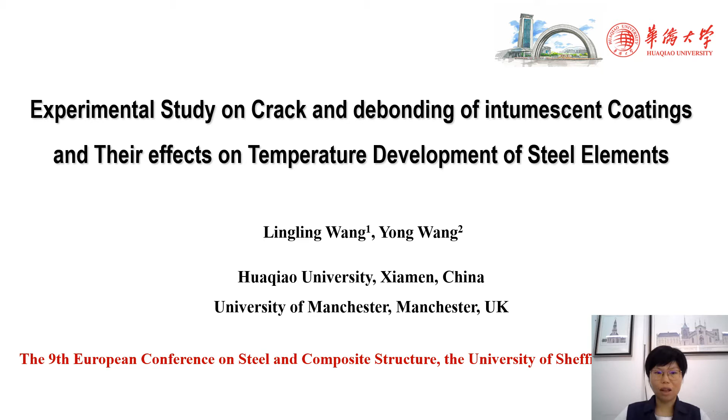Today, I hope to introduce my ongoing research on crack and debonding of intumescent coatings and their effects on temperature development of steel elements. In today's talk, I will cover 4 parts: introduction, experimental program, test results, and conclusions.

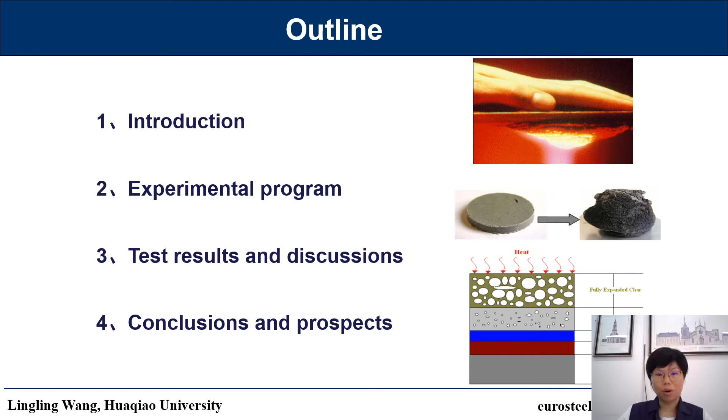Compared to other types of fire protection materials, intumescent coatings have become the preferred option because of their merits such as attractive appearance, lightweight, and off-site application.

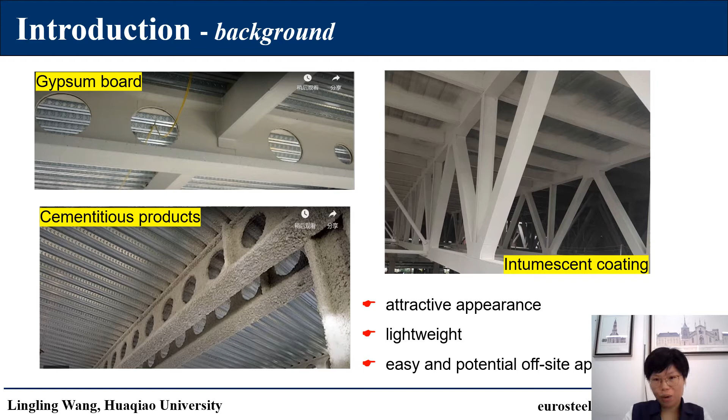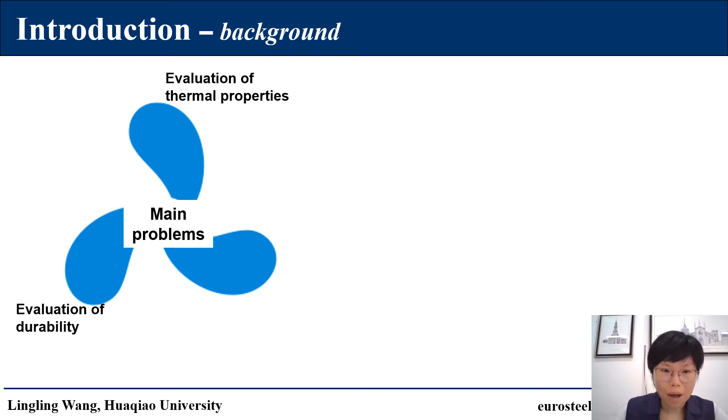Despite widespread use, many gaps exist in understanding of fire protection properties. Although progress has been achieved on the evaluation of thermal properties and durability, bonding with a protected substrate and the effects of their failure on steel temperature and structural fire resistance have not been investigated.

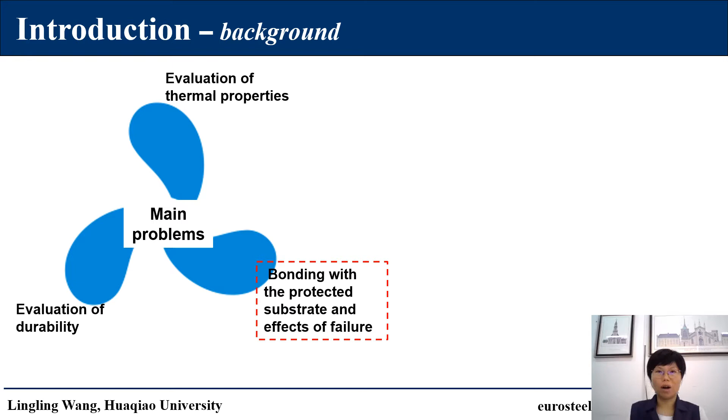In the specification, it is assumed that the intumescent coating char remains and provides a uniform fire protection. However, cracking, debonding, and sometimes falling off are expected to happen because of the property mismatch between the coating and the steel. Under these conditions, a non-uniform temperature distribution will occur in the protected steel substrate, and the behavior and failure modes of steel structure may change consequently.

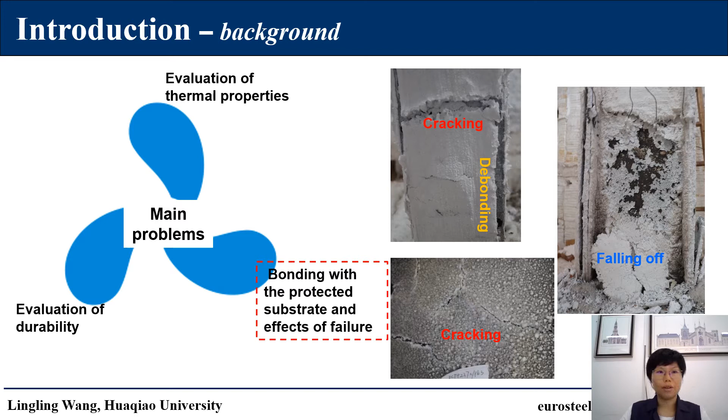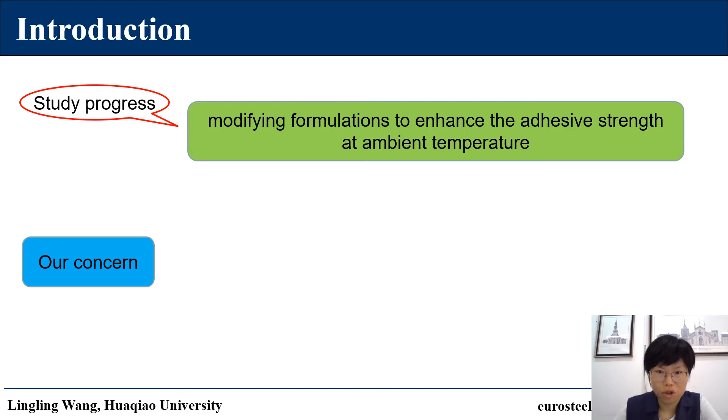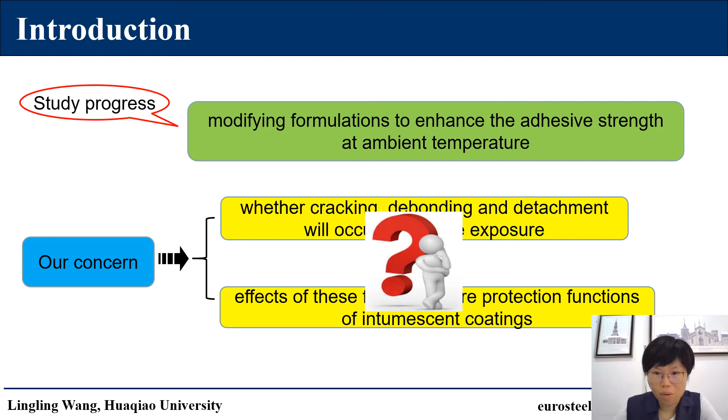A few studies have been carried out on the bonding properties of intumescent coatings. However, these studies have focused on modifying formulations to enhance the adhesive strength at ambient temperature. Engineers need to evaluate whether cracking, debonding, and detachment will occur during fire exposure and the effects of this failure on fire performance.

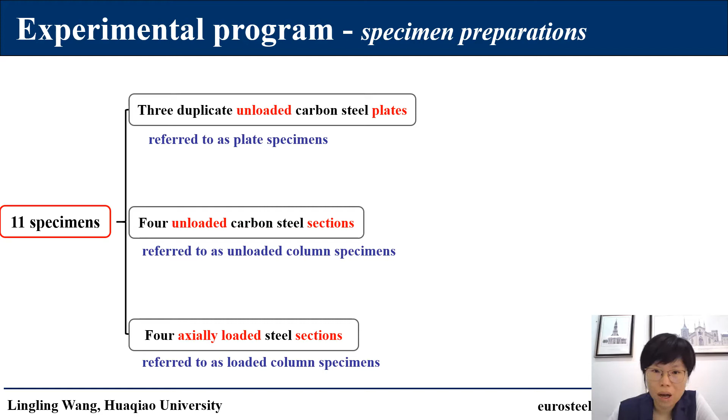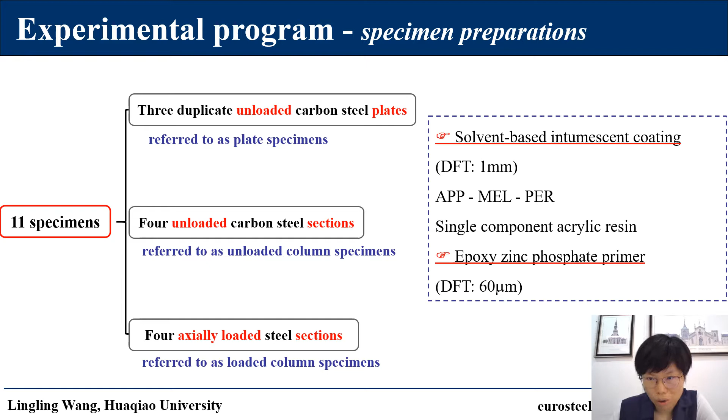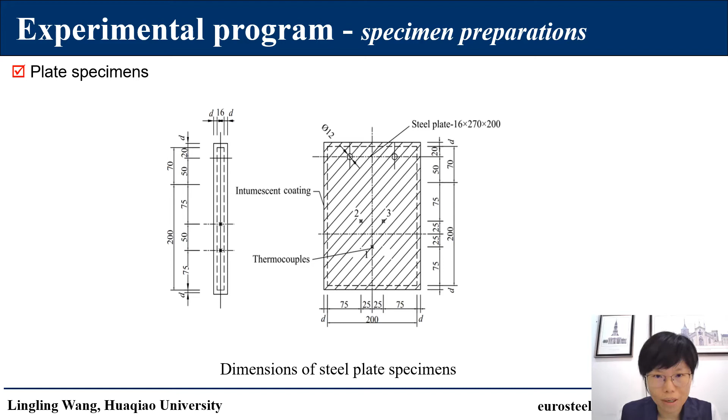An epoxy zinc phosphate primer was used on the surface of specimens before applying a solvent-based intumescent coating. The steel plates were protected by a primer and an intumescent coating on all sides. 3 thermocouples were embedded in each steel plate at the mid-thickness.

The 4 unloaded column specimens consist of 2 duplicate I-shaped specimens and 2 duplicate T-shaped specimens. These specimens had primer and intumescent coating on all sides except the top and the bottom, which were protected by a 100 mm thick rock wool. Temperatures were measured at 2 locations along the column height, with 6 thermocouples at each location.

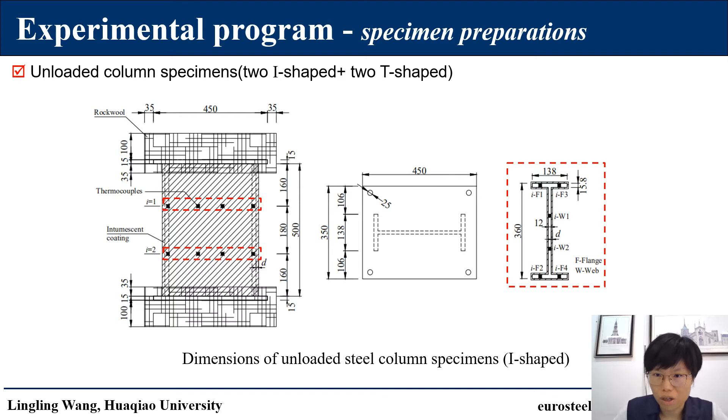Loaded column specimens consist of 3 I-shaped specimens and 1 T-shaped specimen. 1 loaded column used stainless steel, the other 3 used low-carbon steel. 1 of the 2 I-shaped carbon steel columns was sandblasted before applying a primer.

1 test specimen had 1 layer of carbon fiber cloth placed on the surface after the application of the primer but before application of intumescent coating.

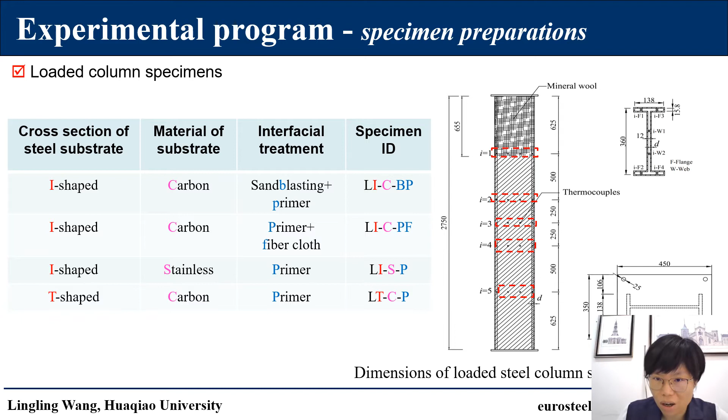The total height of the column was 2,750 millimeters. The exposure height of the column was 2,095 millimeters. Temperatures were measured at 5 sections along the column height, and each section had 6 thermocouples.

The plate specimens were tested together and were hung vertically on steel beams inside the furnace. Each unloaded column specimen was placed on a block of concrete inside the furnace. The 4 loaded column specimens were pin-ended, and a compressing load was applied at the center of the cross-section. Before fire testing, each column was axially loaded to reach a load ratio of 30%, and the mechanical loading condition was maintained during the fire test.

In all tests, the furnace temperature was regulated according to the ISO 834 standard temperature-time relationship. The axial deformation and temperature were measured and recorded continuously. Fire tests on loaded specimens were terminated when the axial deformation or deformation rate reached their limits. Fire tests on unloaded test specimens continued until the average steel temperature reached 700 degrees centigrade.

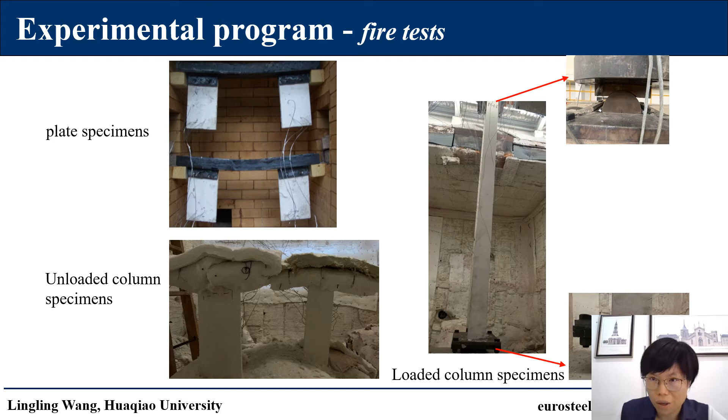With increasing temperature, intumescent coatings underwent melting, expansion, char formation, and char degradation. During the melting stage, intumescent coatings had a relatively high fluidity, which enabled the coating to deform with the substrate. After entering the stage of expansion and solidification, the viscosity of the coating increases, and there is a strain mismatch between the coating and the steel, which may lead to cracking and debonding of the coating.

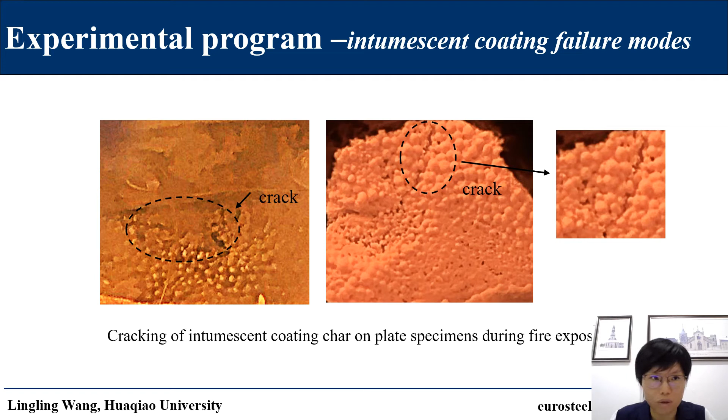This figure shows cracks of intumescent char on plate specimens during fire exposure. After the fire test, cracking of intumescent char was observed for all specimens. According to crack size, cracks can be classified into 4 categories.

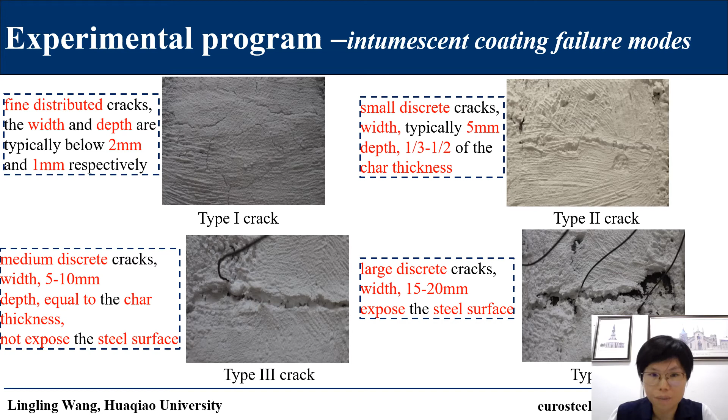These figures show failure of intumescent char for plate specimens and loaded column specimens. Only type 1 and type 2 cracks were observed in unloaded specimens. For loaded column specimens, more serious failure occurred.

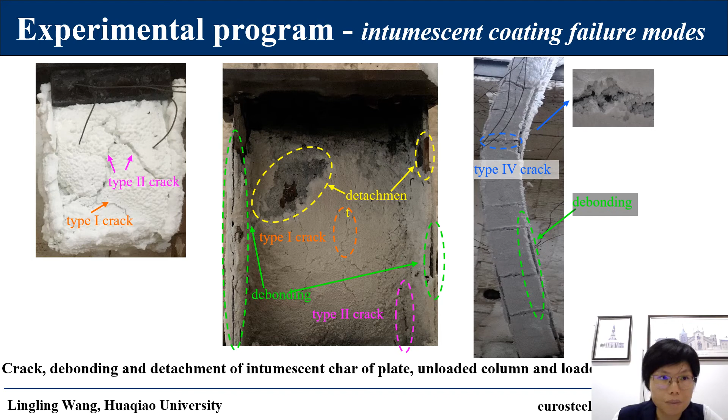These figures compare failure of intumescent char for loaded column specimens. Individual treatment has effects on failure modes of intumescent char. For example, compared to specimens without sandblasting, sandblasted specimens had larger and more cracks but less extensive detachment, thus less debonding.

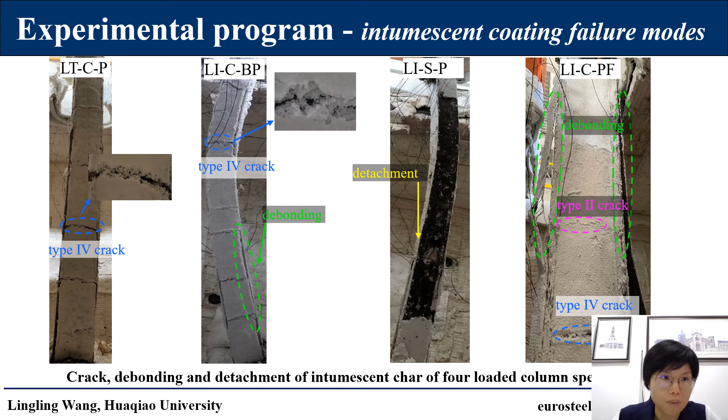This will be examined by analyzing average temperature and temperature distributions in steel sections. These figures present average steel section temperatures along column length, and individual steel temperature measuring locations with the largest temperature differences for loaded column specimens.

Along the column length, there are some differences in average cross-section temperature. However, the differences were relatively small, suggesting that it is acceptable to assume a uniform temperature.

Temperature differences in cross-section seem to be high. In most cases, it's above 10%, taking thermal stress and thermal bowing into consideration, particularly if a column is slender and subject to a high load ratio. A level of 10% temperature difference may have significant adverse effects on column stability.

It is difficult to discern a pattern of temperature distribution due to the random nature of intumescent coating cracks. Therefore, if a non-uniform temperature distribution is considered in analyzing columns, the most unfavorable temperature distribution should be assumed.

Temperature differences seem to have started very early during the fire test, and the same trends seem to have been maintained throughout the entire fire test. There is no evidence of the expected temperature drop. This suggests that extensive cracking and debonding, instead of detachment, would have been the cause of such large temperature differences.

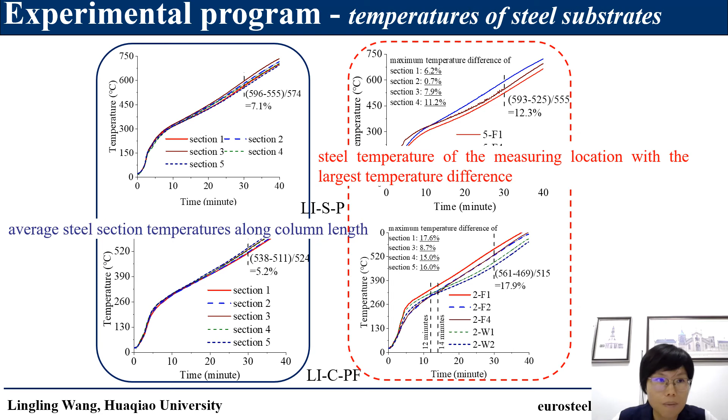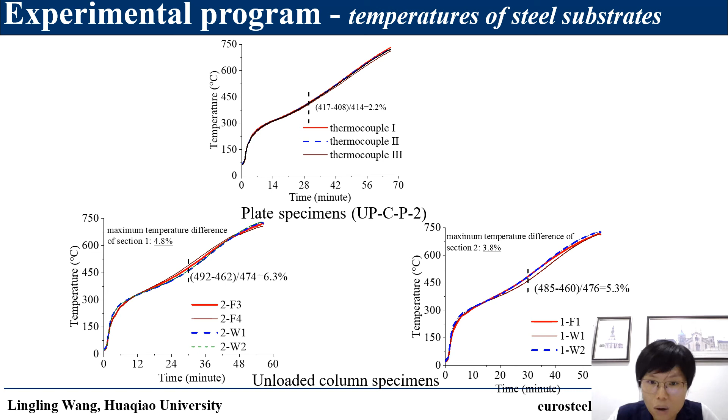Furthermore, cracking and debonding occurred during the expansion of the loaded column before any sign of failure. For plate and unloaded column specimens, the maximum difference in steel temperature at 30 minutes of fire exposure is about 2.2% and 6.3% respectively. This suggests that unloaded specimens may be considered to have uniform temperature.

This figure compares average temperature of unloaded and loaded column specimens where the maximum average temperature occurs. The unloaded and loaded column specimens had very similar section factors and the same intumescent coating data, and were tested in the same furnace. Therefore, the observed large temperature differences can be attributed to the non-uniform intumescent coating behavior.

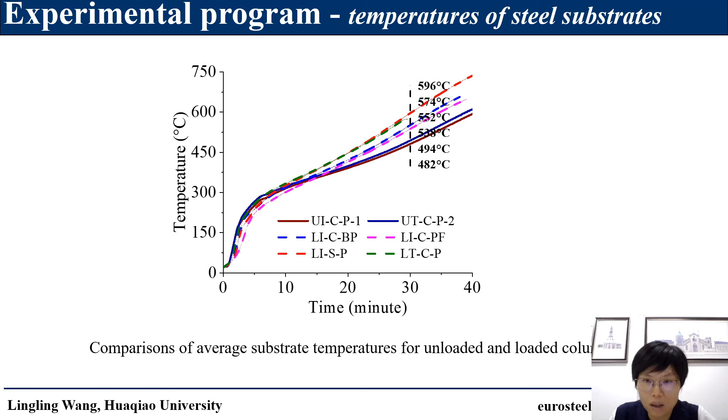According to the specifications, unloaded tests are used to calculate the effective thermal conductivity of intumescent coatings. Conducting fire tests on unloaded column and plate specimens is an economical method. However, in order to ensure that such results can be safely applied to loaded specimens, it is important that effective thermal conductivity results from unloaded tests are modified to incorporate the effects of cracking and debonding on intumescent coating behavior.

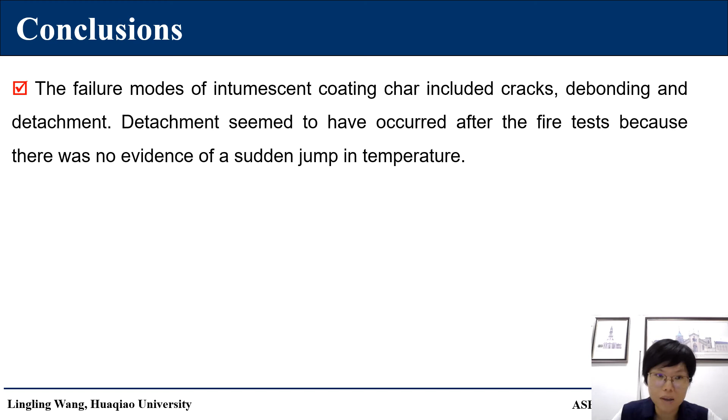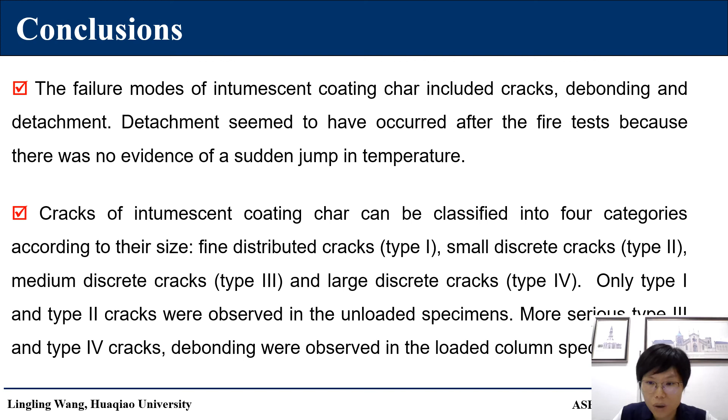Conclusions: the failure modes of intumescent coating char included crack, debonding, and detachment. Detachment seemed to have occurred after the fire tests. Only type 1 and type 2 cracks were observed in the unloaded specimens. More serious failures were observed in the loaded column specimens.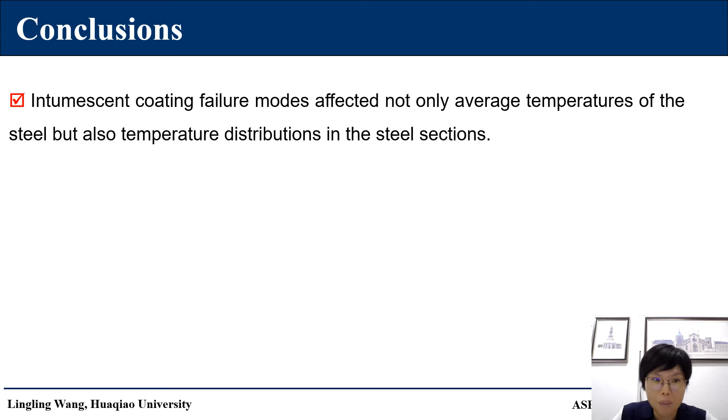Intumescent coating failure modes affected not only average temperatures, but also temperature distributions. The temperature differences for the unloaded plate and column sections were relatively small, while they were high for the loaded test specimens.

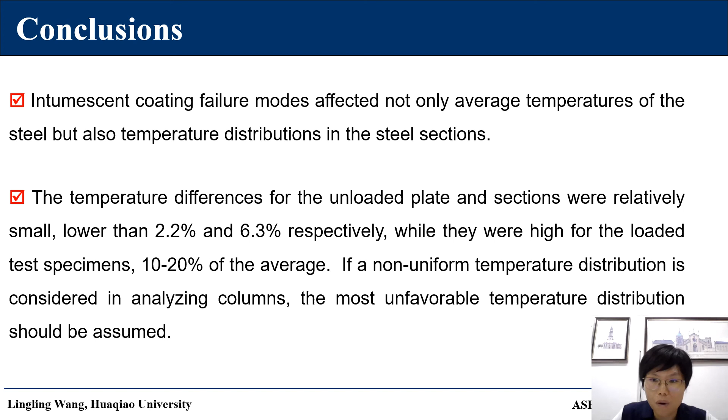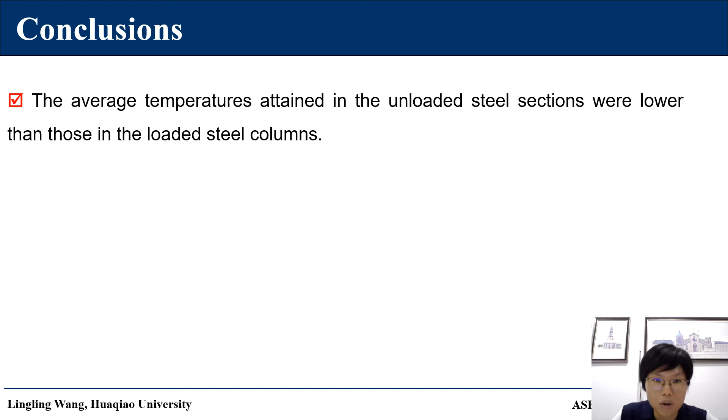The average temperatures in the unloaded steel sections were lower than those in the loaded steel columns. It is important that the effective thermal conductivity results from unloaded specimens are modified to incorporate the effects of cracking and debonding on intumescent coating behavior.